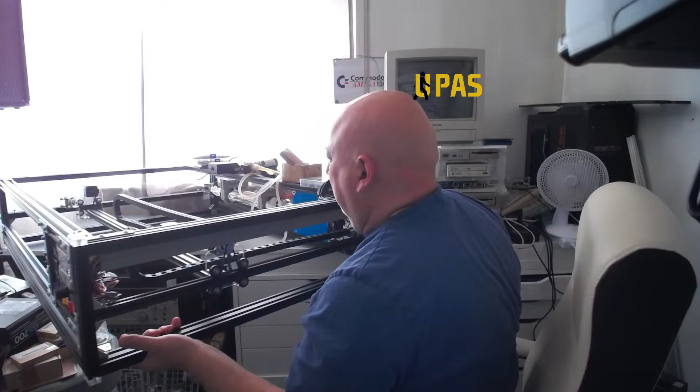I've got to try and shift this around slowly. I was going to do this last night, but I was so tired I went to bed at about 9 o'clock. So I was too tired. Right.

Right, what have we got? Okay, well we can see it here. That's alright, yeah, we can wire that. Right, let's move some of this stuff out of the way. Let's give it some weight, which will stop it tipping down.

Right, I put a load of these temporary things in just to hold everything in place. I'm going to be taking all this stuff off and wiring it in with those terminal blocks that I've already got, wherever I put them.

Alright, can't need to find them. Down. Somewhere around here. Right.

Yeah, I've got a load of these connector blocks, so just grab another one. Oh, that's broke, that one is. So it must have been broke in transport, whatever, let's get another one.

I've got plenty of these, so right, let's get another one. Let's put them away.

There is one out here somewhere already, but I don't know where it is. Can't find anything in this drawer anymore. Okay, can't find it. Oh well, we'll just use another one then.

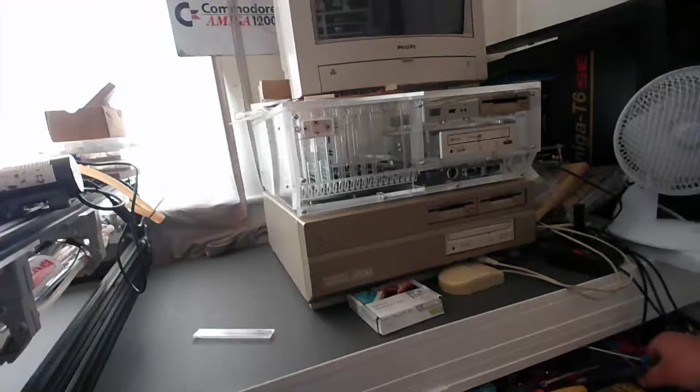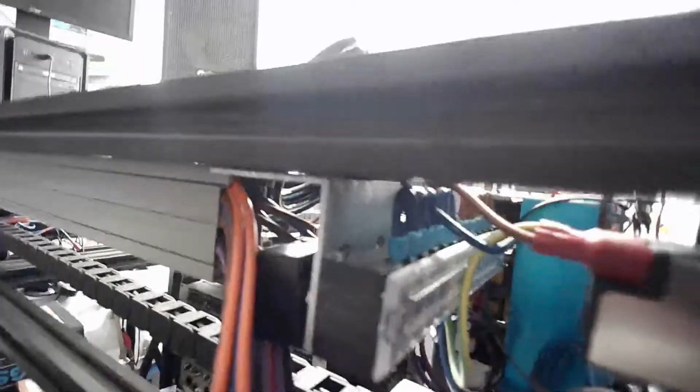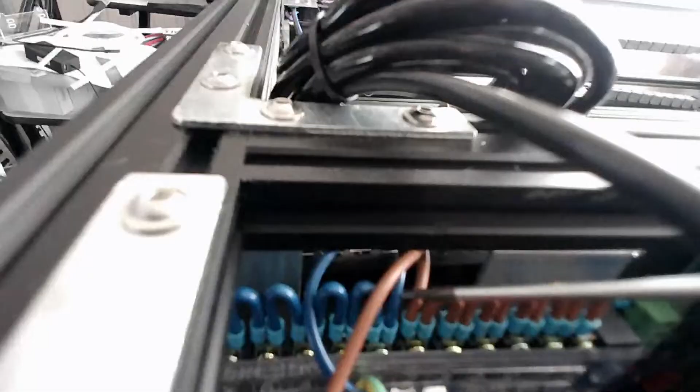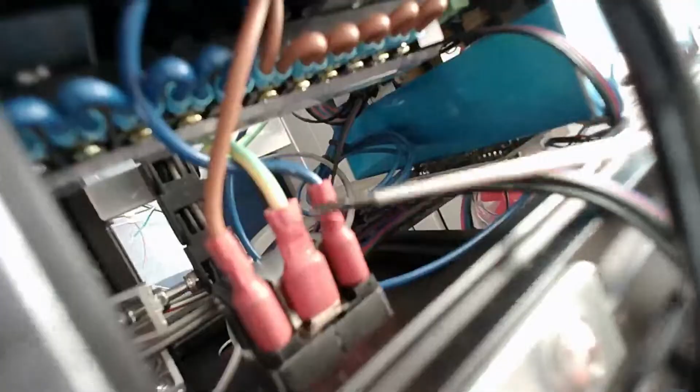Right, so we've got this one here, it's the mains. It's got neutral... can't see it... neutral and live joined up, and this 2 panel. Neutral live goes to the front rocker switch, and also got neutral and live on the back of this IEC connector, which goes out to the switch. It goes from the mains input over to the switch at the front. Switch then comes back over to this distribution here. I'm only using, I've got some wires wired to it underneath. We've got live and neutral going over to this plug on the power supply. I've also got an earth that goes on straight to the back here, I think. Yeah, the earth goes straight to the back on the earth pin on this IEC connector.

Alright, so the idea is to somehow wire all this. Probably it would have to go to, we don't want too many links if we can help it, so we can go to a terminal block and then go out after with a little link, or we can go straight to where we want it. Would make more sense. Otherwise you're doubling the work, having to go to one point and then out to another, and you could label up what each wire is. But there's 31 wires.

Anyway, I have an insider's view of a streaming setup, the radios and all the rest of the stuff. Yeah, it's crazy, yeah. Streaming land. What the hell's that? Who's that moaning about? Some idiots on this radio.

Anyway, right, so you got a little close up of this corner piece I milled. This is literally to stop me scratching myself on it. I put one on the bottom, I'll put one on the top, so it stops me scratching my arms on it, stops me taking slices out of my arms.

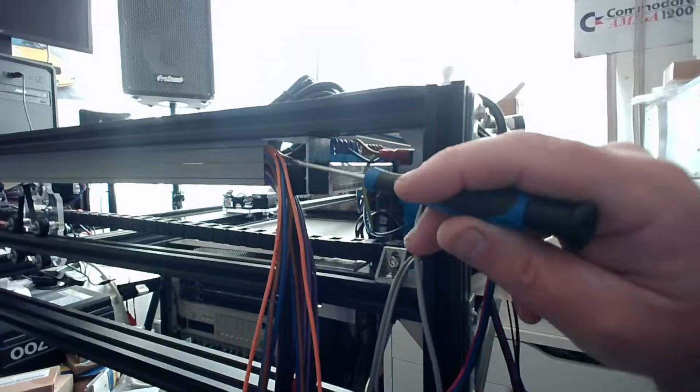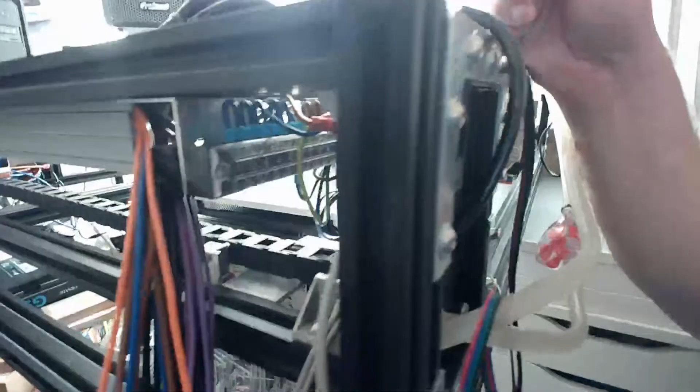Right, so I'm just contemplating whether to wire this straight to that and then join, so it gets rid of all these wires, and then I have to come off there and go around. Lots of that stuff just connects here anyway. Well, yeah, some of it comes down to the mini Gerbil, the mini Gerbil. So we've got stepper motors.

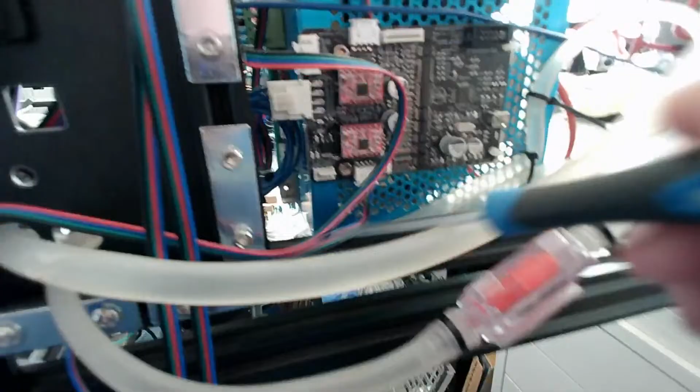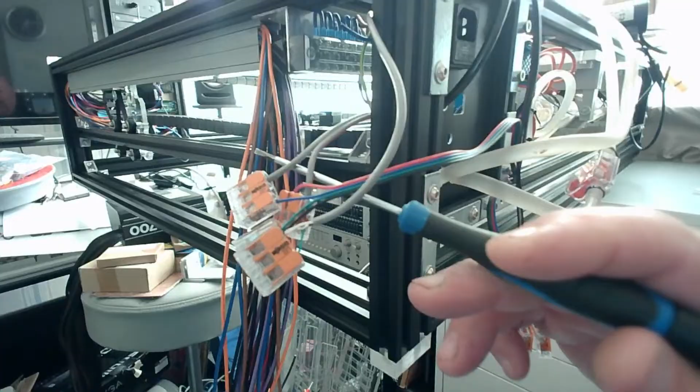So I've got to connect... yeah, there's some more joints down here, I think. Actually, there's not, that's just the limit switches, there's all the limit switch connections. But these have got to be taken off, these are temporary. All these were just temporary connectors, just to sort out the wiring. Once it's proven, it can go and be wired permanently to one of these.

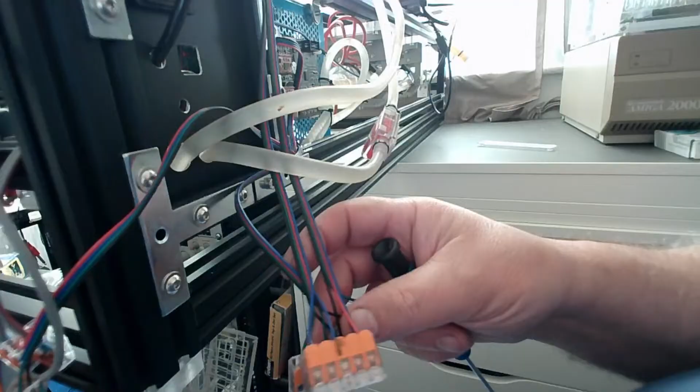The same with this one for the stepper motor directions. You've got your 3 stepper motors, and these 2 actually swap over, all these 4, yeah, they swap over. This is literally a lead to the Y, and then 2 stepper motors coming in, so all that's got to be changed as well. I've just borrowed these to get it working, but I've got to give them back to the van, I'm not using them, I'm using another one.

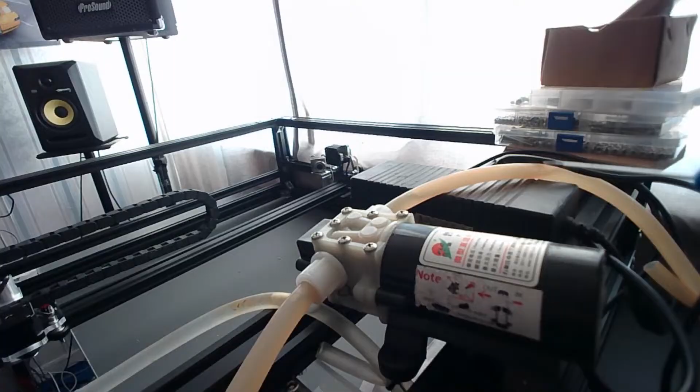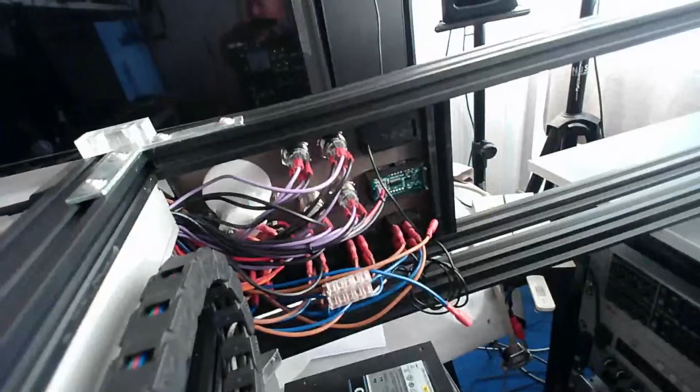So that's what we've got so far. There's a bit of kink there, that's not good, so that's got to be rerouted. We've got our water pump, it's got to be mounted, and there's a power supply for the water pump, 24 volt there. I also need 12 volt DC to power the meters, there's the back of the panel to power those meters, 12 volt DC.

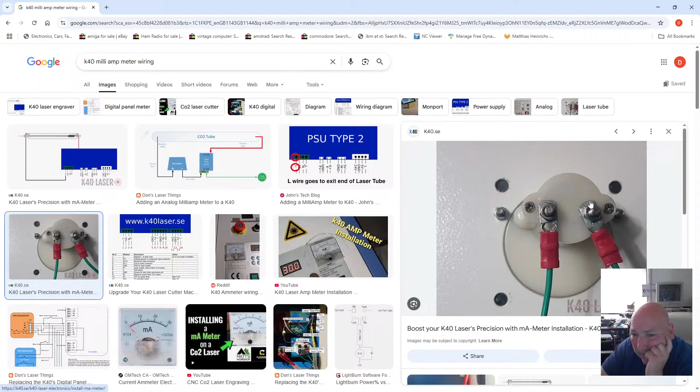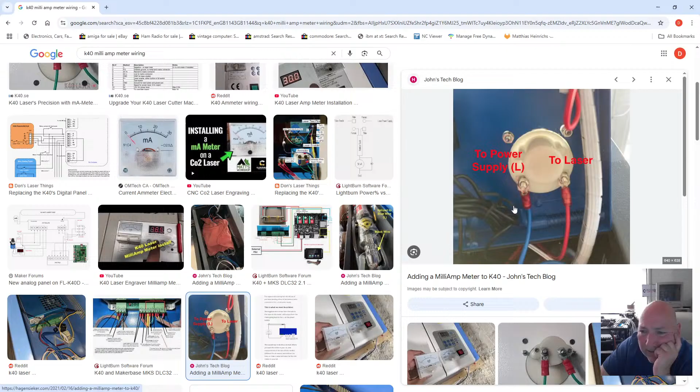Right, K40 milliamp meter wiring. Right, milliamp meter, right, there's one. Doesn't show you plus and minus. No plus and minus. Right. This one shows - mixed bag. That just shows you a meter. Oh, it's a 50 milliamp meter.

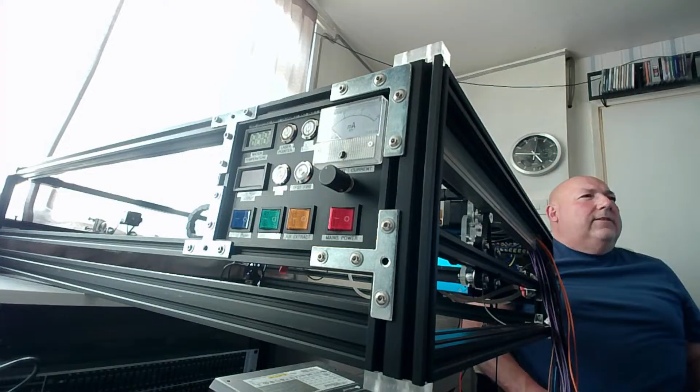Right, so I put a bell test on it. I can't see, right, so I'm going to use this roaming cam to position, set this over here. Right, we can see the meter. If I put the meter, hopefully we can see the meter go up or down. Let's see.

Oh, definitely moved, but not sure which way around. So that's going down, so I'll swap my probes around. Let's go the other way. Yeah, that's definitely going up, isn't it? Yeah. So it says put, well, I don't know which way the plus and minus is. Oh dear.

So I've got my plus probe on this wire, and they said that's got to go to, I forgot what it said now, so the minus has to go to the plus on the meter. So that's that one, if it's going the right way. Right, let's sort that out. So that is going to go over to, yeah, that wire there. Right, so I need to extend that wire to reach over there. Cut this one - well, if it's wrong, I can always swap them at that end after. And that's going to go over to there. Now, is that going to give me enough? Probably, let's keep the wiring the same.

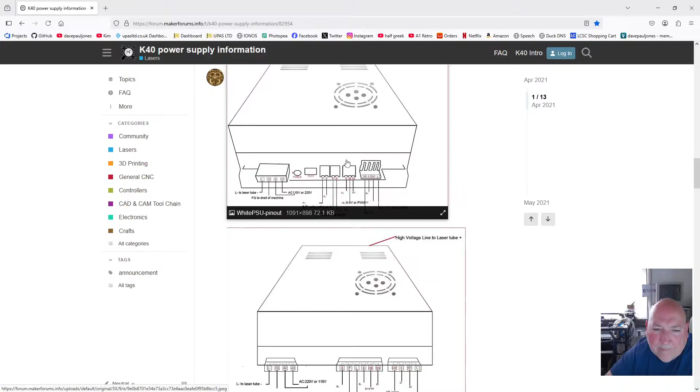Right, which one did I put it on? No, that's not it. That's not the one. Just trying to get to it there. Right, there's the power supply. There it is, that's the one I've got.

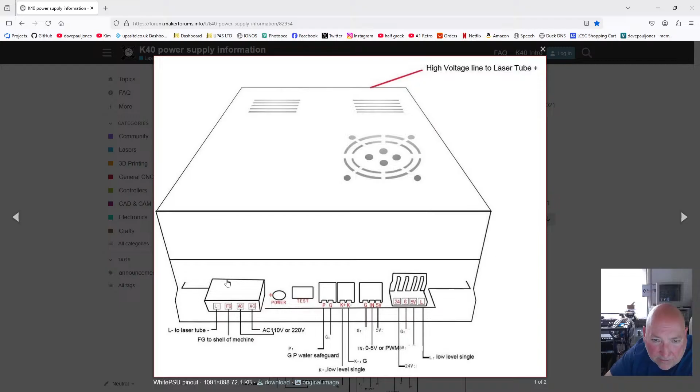So you've got L, low level signal, that's to enable the output, which comes out, cathode comes into there. The red wire goes straight out, so I've got to interrupt that through a stop circuit. So I've got to break a connection.

So we've got to find that plug with a connection on it, and it's just down here, and it goes straight to the panel. So I've got to unwire this.

So I could go onto this camera again. Right, so we're on this one. I suppose I could put this up here.

Ow! Oh yeah. Ow! Just burnt my arm on the saw. I forgot I left it there. Let's turn it off, I don't need it in a minute. Did I burn it? Not quite, not quite, that's okay.

Right, so I'm going to put this, try and put this somewhere we can see. So I can put that over the top. How about if I shove that like that, looking down like that? Maybe. Or like that. Like that, maybe. Can't see a lot, yeah, there's not much you can see really. Anyway, we'll do a bit like that. Why not?

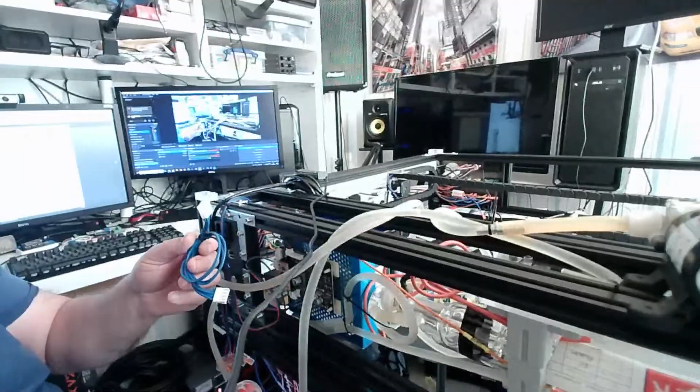Right, so I've got - oh, there's another one. Put the loads on it. Right, so I pulled it off, that's alright, pulled it off altogether. You can't see. I pulled it off, so let's get this tie off.

Okay, right, I must have burnt my hand, because I must have burnt myself. Yeah, a little bit. Right, so we need to interrupt one of these cables.

Now one of these was broken and I had to fix it, so I fixed it. So that one plugs into there. Now I've got to see if these are all the way through. That goes to that one, second one goes to second one, and the third one goes to - they're all the same bloody colour.

Right, I don't know which one's which now. Right, I don't know which one's which. So that one's that one, and that one's this one.

Oh, that's weird. Oh, it must be that one. I don't know, anyway, I think it's according to the power supply. It's the one that's on the left, this one here. So what we're going to do is cut this one here.

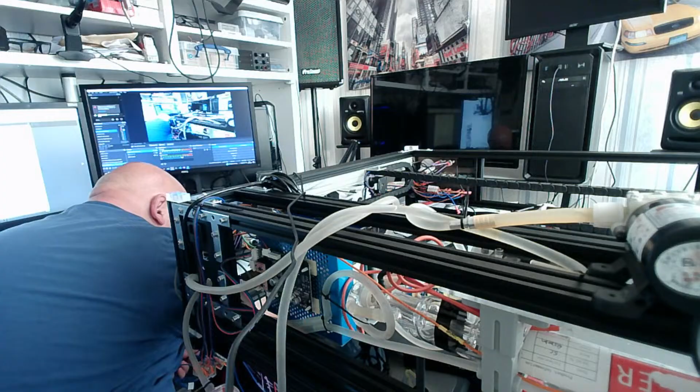Strip these back. Let's put some ferrules on them. Couple of ferrule cats. Right, okay.

Right, so now I need to connect this to - alright, so this will have to go up to a connector block. Alright, so that goes over like that.

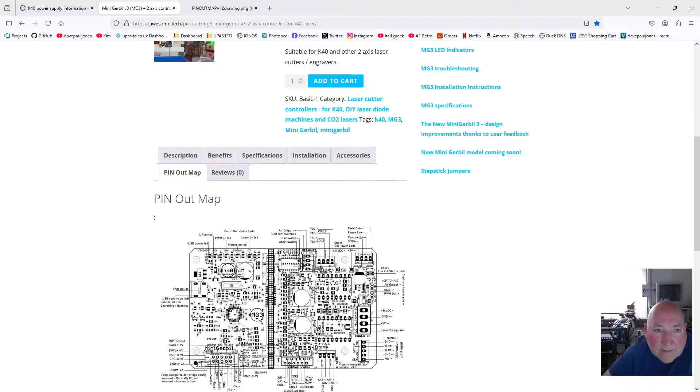Right, so what I need now is a drawing of the - another drawing of the Mini Gerbil V3. Alright, so there is low signal, laser on signal, LO, LO, which means laser on. So that's got to be connected from...

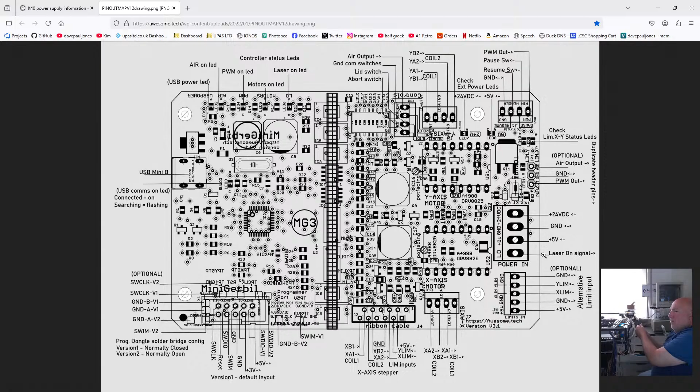Laser on, which one is it? It's - hang on, I've got it upside down, haven't I? But my panel's the other way around. So laser on is the top one, which is the right one. It's the right one I've cut, yeah, it is the right one I've cut. So I've cut laser on, which is the top one.

And that has got to go through a switch. So through a switch. Now I'm trying to wire it up. So...

Okay, so I could wire it up to this. Wire it up to this, so let's just do that then. Let's make the laser on signal, that's it, let's just do that.

Alright, here we go, I'm going to put it on the end here. Now it will go on that way. This one's cracked as well. Right, so it's going to go on that way, so it's going to go on the underneath. Trying to work with everything in reverse here. So that's going to come into there.

Wire that to there. Now the other side is going to go next to it, and all I have to do is splice, find the two cables for the laser on switch, and wire it up into the top. Now, hang on, is it the top? Yeah, the top of there.

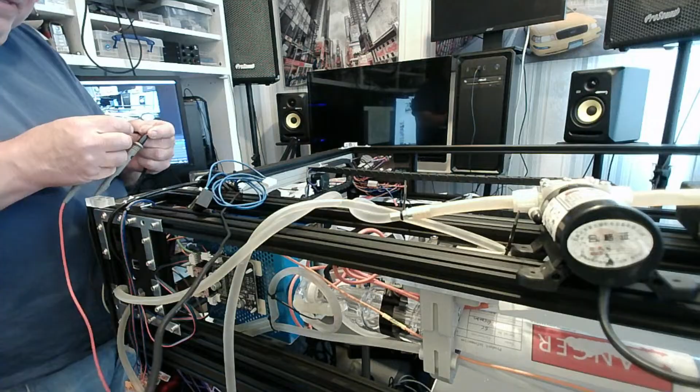Alright, so okay, so that's the enable switch, I believe. So let's try it again. I've got continuity. I'll go and switch the switch off. Continuity should have gone now. No, it's still there, so that's not it. It's still there.

Alright, now is it that? Right, I found a switch, but it's not the right switch. So, but they are going to the same thing, so I'll put a knot in that because that is a pair. Right, now I need to find some other pairs.

Right, very thirsty today. Very thirsty.

Right, so we just got to find the pairs. Now, did I switch them back on again? No, I did. Now I've got to find a pair of cables that are short. So that's not one. Let's try some others. Not that one.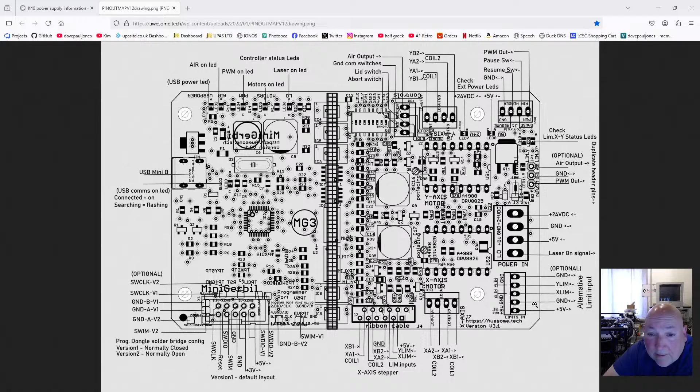Right, so what's next? Let's have a look at the model. I'll open up the model. We'll have a look at the model, see which wires we're going to do next. We can't do them all, we can just do a few. Well, we can do what we're ready to wire up, so we can at least test it and set it up.

Alright, the radio's hissing away. It's red hot in here, with all these computers and monitors on. Red hot in here.

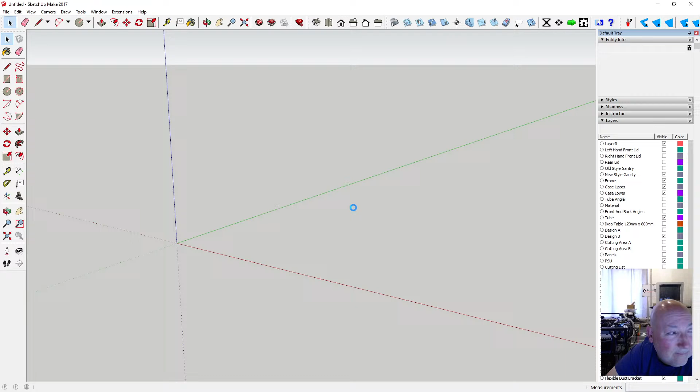Right, here's the front panel. So I've just done that one, laser on. Test fire, we can't do that yet, because I've got to work out how to wire that yet. Laser pointer and LED lights, not yet. The mains is wired. Air extract, air system, water pump we can do later.

Temperature gauge, we've done this one, it's just a sensor. This one, power outputs, that needs to have a transistor put on it with a pulse width modulation out, so that's not going to go anywhere yet. Test fire, so the pot is controlled in software at the minute. So all we need is to be able to switch it on and turn the laser on and off, and the meter. So basically we've got what we want. The water pump.

Actually we can terminate, yes, because once we switch this on we're going to have potentially live wires coming out. So we need to terminate these into a terminal block at least. Yeah, so we can do that. And they really need to go on a separate terminal block. How many do we need? So we need live and neutral, live and neutral, live and neutral. So we need 6 terminals. Yeah, we can do that. I can leave a space.

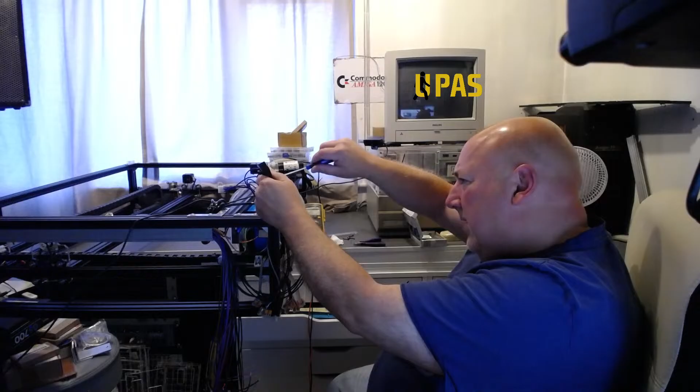Right, so this is the laser pointer enable, so that's going to go next on here. So at least we keep all the switching on the same unit, and I keep the high voltage on a separate one.

Right, so there's a lot of live streams and they're long-winded. What I'm going to do when I've finished it, I'm going to do either a 10 or 15 minute run through the videos. I'll edit it though, an edited one, 10 or 15 minutes from start to finish of the laser, with all the tips I've learnt along the way and information, and it'll be a bit of a helper for anyone trying to build their own. Some of the questions that I've asked take you a long time to find them out. Might as well watch that video and you'll learn it quickly.

Right, so that's the laser pointer wired now. I'll switch over and wire. Next is the LED light, which is that one there.

Just done that one, I'm doing that one next. So another 2 black wires it is for that one. I've just switched the other one off and switched this one on, so it's got to be one of these wires here. So I'll take one of them.

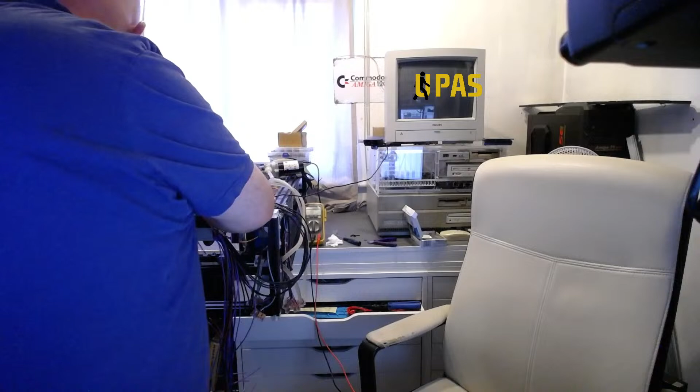It's definitely the right one. That's definitely one of them. Let's get to the purple. Right, that's the black. Let's do the black next. Yeah, that's definitely the one. That's definitely them two. I'm looking for purple. Right, purple. That's that one.

Okay, so we've identified the pot. Right, this is the pot, 3 wires for the potentiometer. So let's just trim them off. Not using this pot at the minute, but we'll mark it off so it's out of the way and we know where it is then.

If I measure it now, it should be giving us about 23k somewhere. No, okay, 28k. Oh, maybe it's a 30k pot then. Yeah, 28k ohms. Alright, so if I connect between there and red, it's 28k. If I turn the pot halfway down, 14, yeah. So that's definitely the right one.

Now we'll put some ferrules on it, get it wired somewhere. Well, we've run out of switches now, but what we haven't brought over is the LEDs. So we've got the switch, and then we want the LEDs. They've got to be switched on and off. So there's more to that circuit than meets the eye, basically.

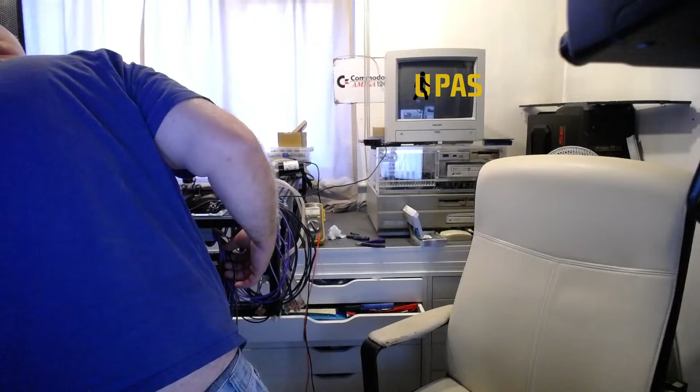It's definitely going to that switch though. Right, push it in. Try again. Yeah, it's going there now.

So that's common there. Tell you what I'll do, I'll just push it into that terminal, because we're not using it at the minute anyway. If I push it into that common, this one will be normally closed. So if I measure that now, it'll beep no matter what I do with the switch. It's beeping now. I turn the switch, yeah. So that gets rid of them.

Right, what's next? Next is these six wires that switch on. Now there's six wires that switch on the air extract, air assist and the water pump. But these are potentially live wires once they're switched, so they need to go to... scraggy wiring. You need to pull each one of these a little bit.

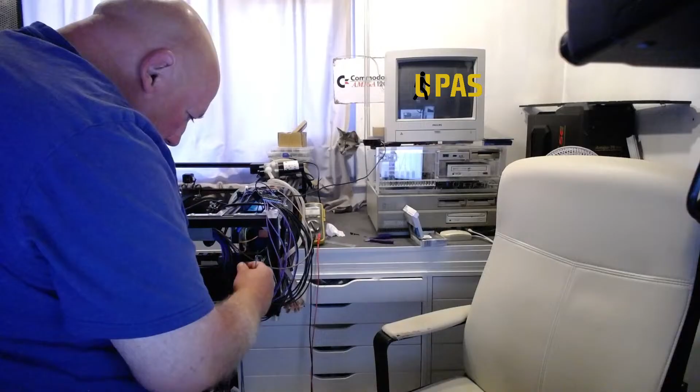That's the negative for that one. So when we're ready, all we've got to do is put our air extract negative and live onto that top, and we've already got the ability to switch it. Right, find two more. So air assist now.

That's... oh, we haven't even got a ferrule on that one. Said it was the last ferrule, I was lying. I found another one.

Right, so live first. Okay, now the live. No, the neutral, sorry. The neutral. Okay, so the only two that are left are the water pump. Let's just make sure them are on. Yeah, them are the ones. Okay.

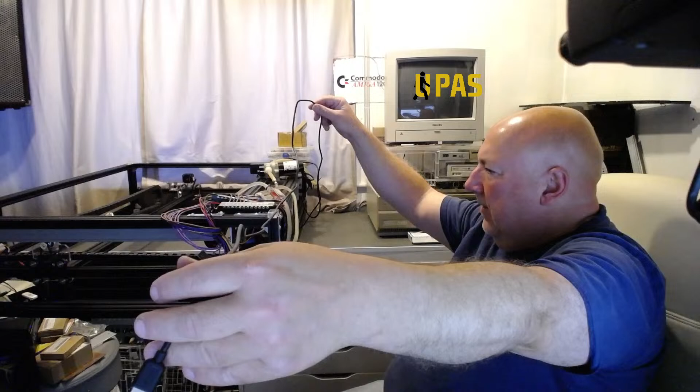Now I've got to somehow spin this round while still having this here. Right, that's going to be interesting. So, right, I've got to spin this round now. Oh, we've got to get a mains cable in as well.

Right, we've got a mains cable to plug in. Now that's in. Now some of the switches are the wrong way around, so the LEDs will be on when they're supposed to be off and vice versa. So I'm going to have to swap them around till they're right.

Right, so I'm ready to plug in, sort of. And I've got to turn it round. Why have I got to turn it? Oh, so we can see the display and operate the buttons. A bit safer now, so we can turn it off from there instead of coming round here to turn it off. Right, let's balance all that on there.

Right, here we go. I've got to swap it all around now without severing any of the cables. I've got them hanging around here. Right, here we go. I must be mad. Why did I make this thing? I must be crazy.

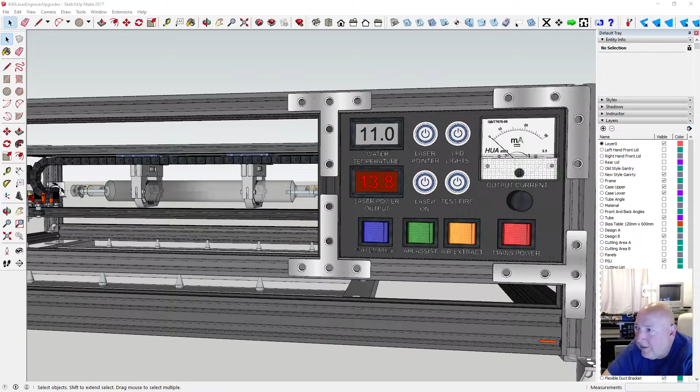Now at the minute this drag chain here, better if I show you on the model actually. So on the model, I've put that plate there, but we've got all this sticking out, all the wires. And when the carriage gets to this point, this bend hits there, and the carriage is still here, so it might be too much drag chain in it - I might have to take some drag chain out.

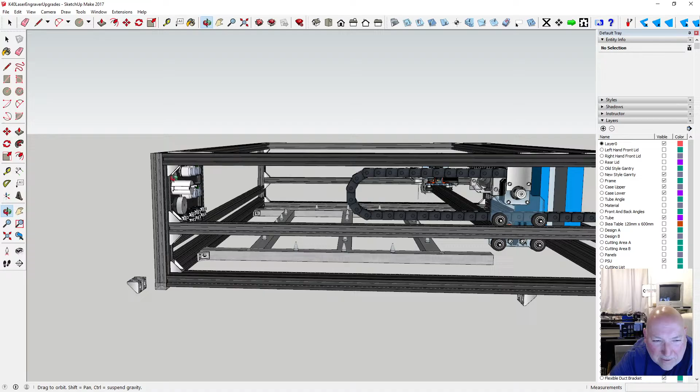Now that's not going to be easy because it's all wired up, but it was all measured up without this in place. So I think what I'm going to probably have to do is devise something for this to stick out a bit, because I really want all this cutting area, so I'm going to have to mount it.

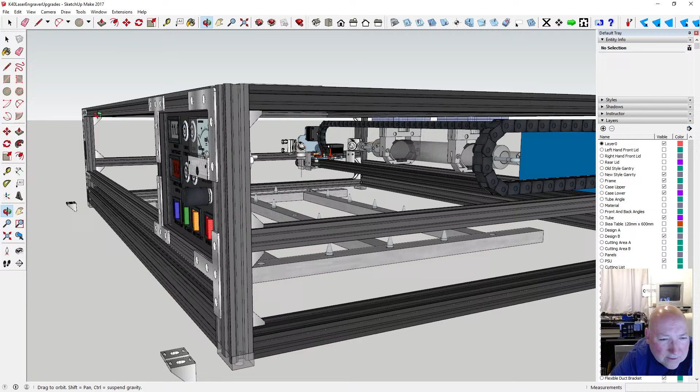Yeah, I'll figure a way of mounting this plate out, so at least the back is flush. Yeah, I think I'm going to do that. And then the wires can come all the way around here and not stick out all over here. So that's what I'm going to do next, and I'll have to try and work that out.

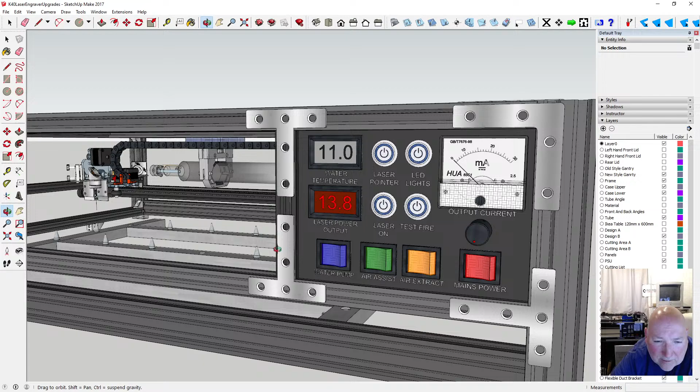I've got some brackets, it's got some angles still. Now, if you notice, these brackets are holding the runners together. If I get the angle done in a nice way, they could replace these and hold onto there, then the panel could sit on the front. Anyway, I'm gonna have to sort that out, but that's only stopping me from going right over.

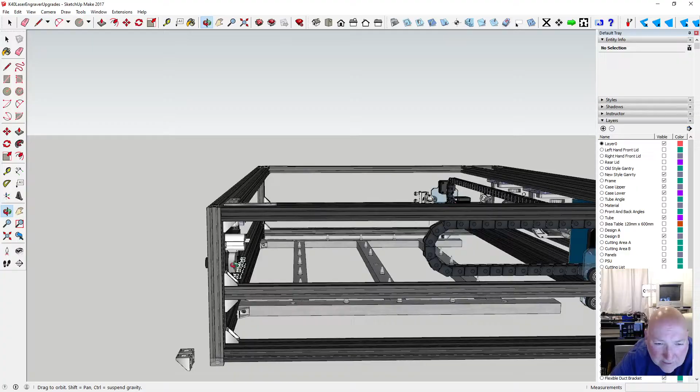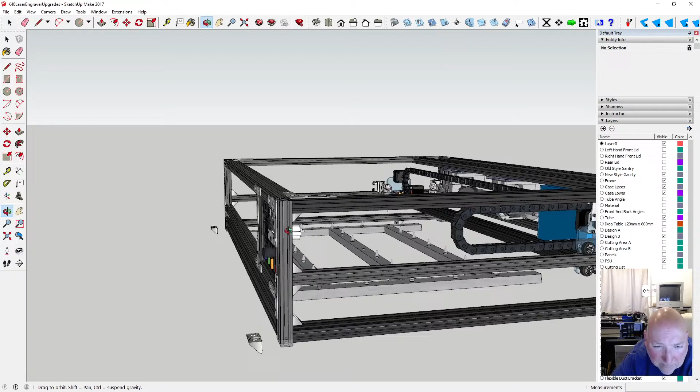For now, to sort out the rest, I could come as far as this and just get it operational. And luckily the wires come out of the trunk and they go around this way, so there's enough wire to push it a few inches this way, to keep that panel level. So I'm going to have to do that. There's not a whole lot of room here for the brackets and connectors, but yeah, we could - they're hung off a bracket there.

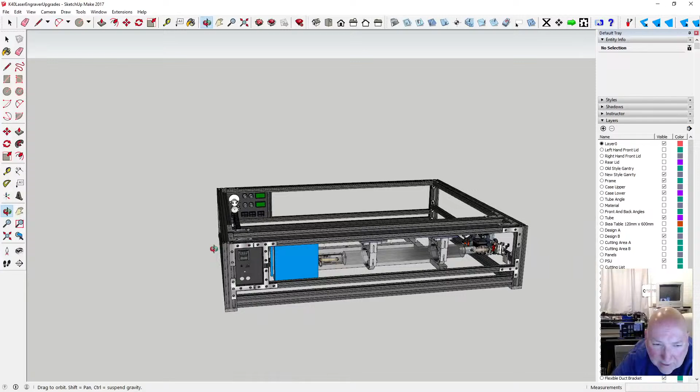Anyway, right, so let's... have you added washer spacers between your wheels? I didn't do that and it jammed my wheels up. Ah, gotcha, Glenn. No, I haven't, no I haven't.

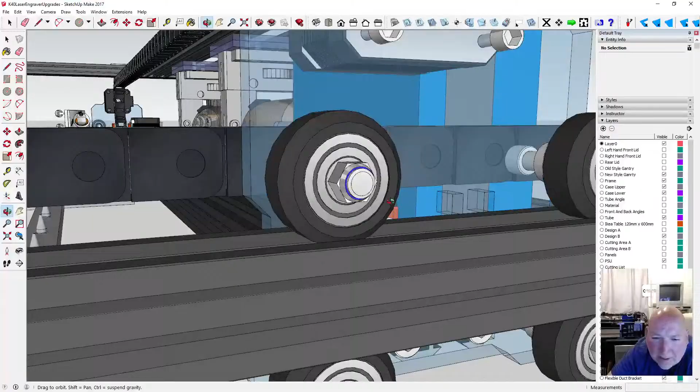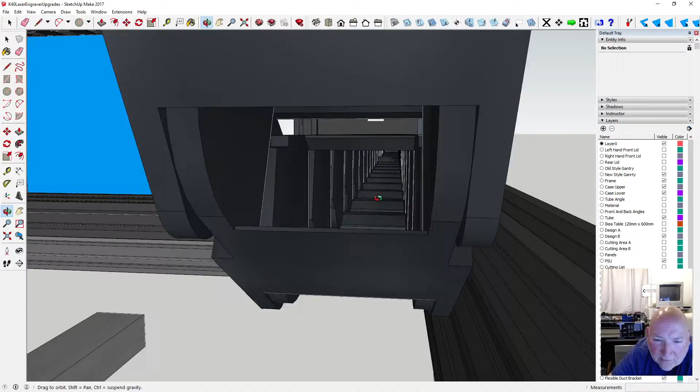And they are varying - if you try different ones, they're working differently. So you're saying the washers, yeah, so on the model, so you're saying in here, washers here, I've got a spacer this side and I've got just a nut and there's no washer. There is no washer, but they were running free until I put the drag chain and pipe, because that drag chain is full up of wires and pipe, and I even had to put a wheel here just to keep the drag chain flowing. So anyway, there will have to be some tweaks done.

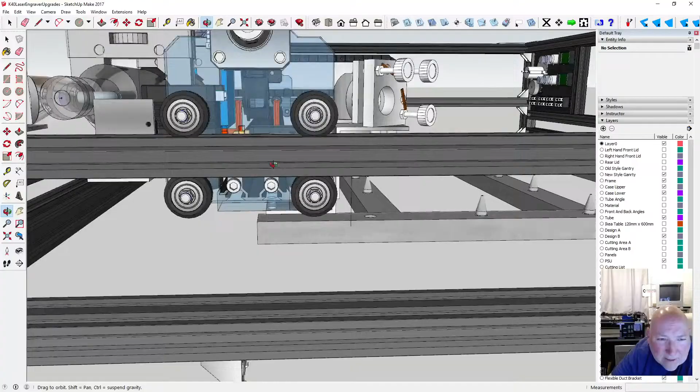So as yet, they're not greased or anything, they're just as they came. So you're saying you have to put a washer? I've got the spacer on it, that's quite a bit bigger than the nut.

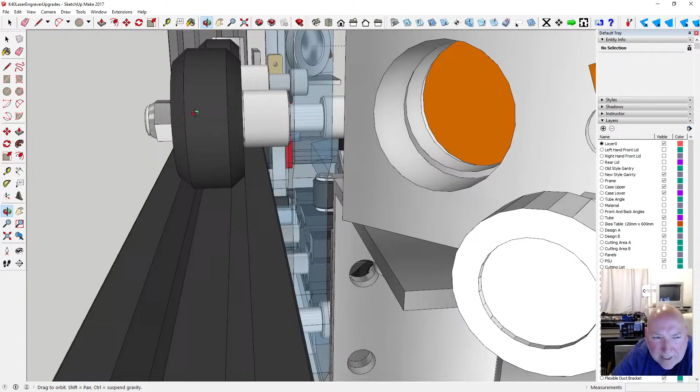I never thought about it, so now I've tightened it. It was tight before I put it on there. I've got some spare parts - spare wheels, spacers, and bolts, and a spare carriage, so I can build one up with the spares and see if it actually locks up. It may not lock up until you put pressure on it, maybe. Maybe now there's weight on it, it's shifted it, like you say, could be.

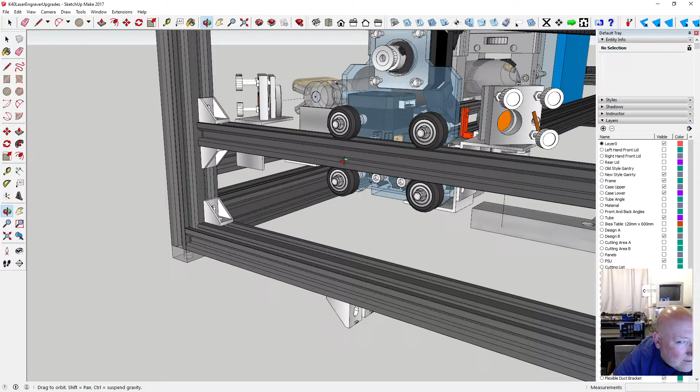I mean, the two bearings in each wheel, a washer goes between them to space them out by about 0.5. Oh sorry, let's read that again - the two bearings in each wheel. Well, the wheels were built... right, I see what you mean. Right, let me tell you what - let's get one out, hang on.

Got some spare parts here, spare wheels. So I've got spare wheels, let's get a spare wheel out. And so this is how they came built, like that. They just came like that.

Now you're saying there's two sides to the bearing, is that what you're saying? If you pull them out, it needs a washer between the two, is that what you mean? I think that's what you're on about, because I think they do come out. Let's try and lever them out with something - what have we got? I haven't messed with them really, I thought they were all sealed up. I can't seem to get them apart.

Not quite sure what you mean - do you mean in between the two bearings? There's two - oh, there is like a washer. There is a washer in there actually, I can see it. On the inside there are two bearings on each side of the wheel. A washer goes between the bearings, yeah I can see, if I point it there you can just about see something like a washer.

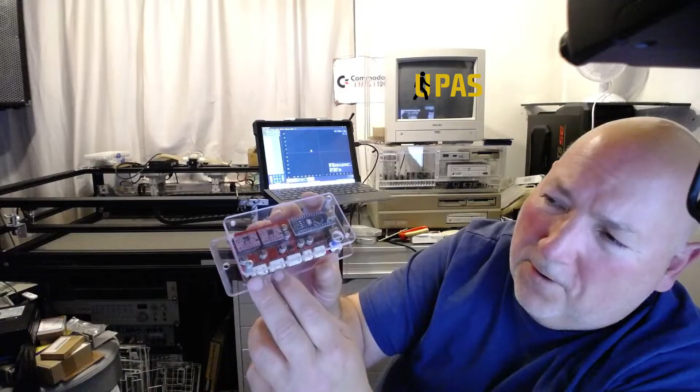The motors are NEMA 17. Yeah, they are NEMA 17s. That's what was on the little one I've got, the little diode laser, 500 milliwatt diode laser.

But there's no drag chains on them, there's no air assist, there's no pipes holding it all back. So, yeah, it's a bit of one of them, really.

Right, let's give you a bit of a review.

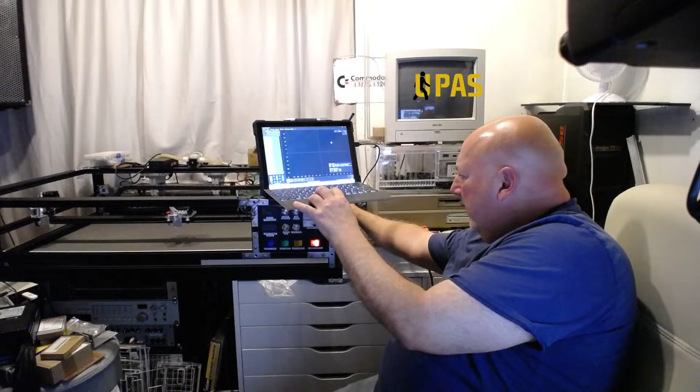It's stalled there, it's just stalled there. I'll give it a bit of help. Yeah, if I'm giving it a bit of help, it's fine. Now it's stalled.

Now there are some settings on the mini Gerbil, dip switch settings, so I might be able to alter them, not sure yet. So not sure, I'll check the settings.

You can split the signal to 2 drivers, same pulse width modulation signal. I see what you mean. So you can get those, yeah, I believe you can upgrade, or better still, some. Okay, so we can upgrade them, and they've probably got some more power rating. Gotcha.

Yeah, I'll do some more research anyway. So the ones that, those ones were just off a very small little 500 milliwatt, no air assist, no nothing, just a little bit of cable hanging off the stepper, so it's got nothing to do really.

So can I, do you know if they're pin for pin compatible? Yeah, I wonder if I can pull them out and plug in the better quality one, the DRV8825, or better still. I don't mind buying a better controller or upgrading something. It's a mini Gerbil V3.1 that's in there at the minute.

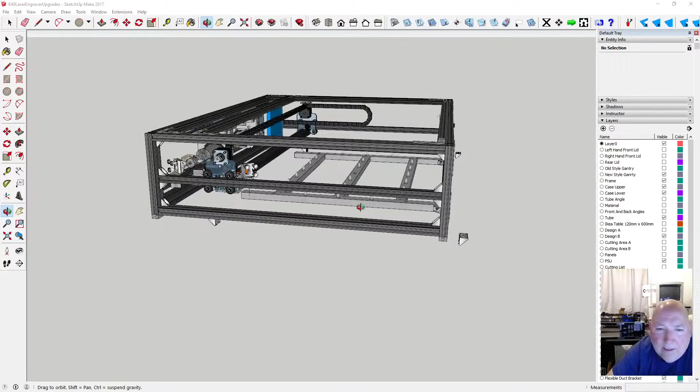Right, let's disconnect from this. There's still a lot of work to do, still plenty of work to do. Once I've got it going, I've got to get it to cut out its own panels. Yeah, it's got to cut out its own plastic panels, as in this one here. So if it put the covers on, panels, that's the idea of the panels.

Very nice setup, look forward to seeing more.

Oh, fair play, yeah. The reason I made it, I was going to go for design A. You can't see it now, hang on. Let's turn off that a minute. Let me just put this into the correct layer. Group it and stick it under design. Design B, right. So design A.

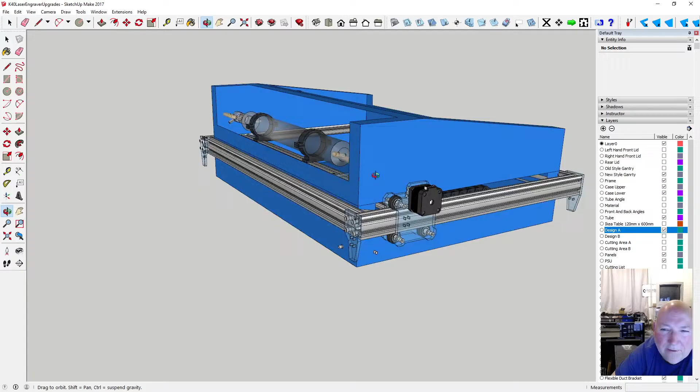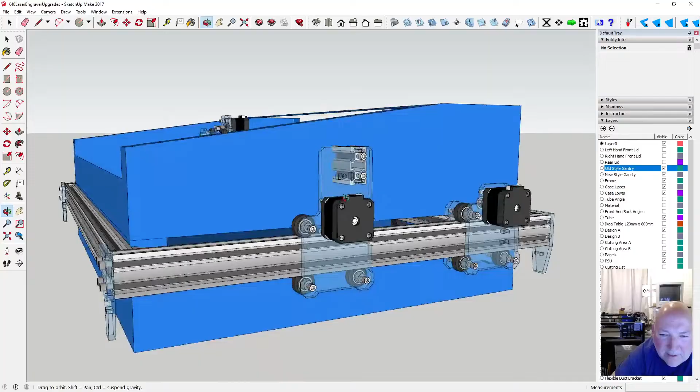This was design A based off a K40. This is similar to my 500 mil size, sort of. That's what it was based off initially, and the 500 milli one, it's got an old style gantry on it. This is the old style gantry that mine came with.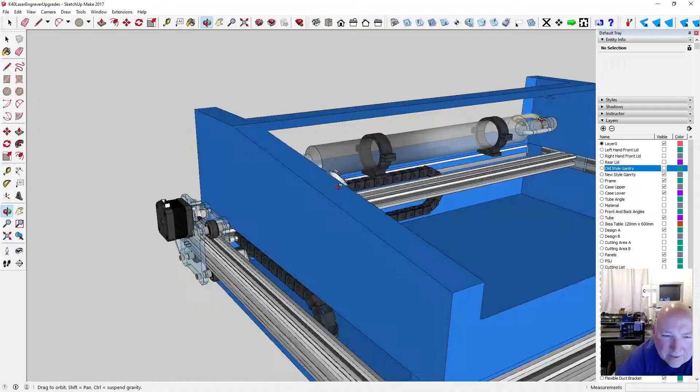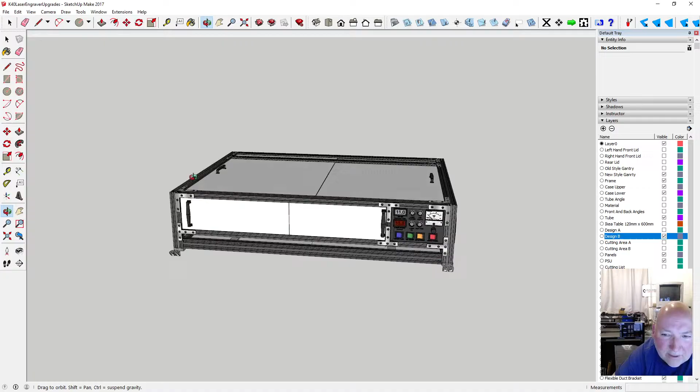That's what I've got basically, and to lower it all down to get it to fit. Originally it was all going to fit inside a K40 case, that was the original idea, but I decided I wasn't prepared to do all that work and then still find I couldn't create the size I wanted. So I thought, if I'm going to go to that trouble, I might as well build a complete one the size I want, basically. Got the slidey doors on it. That's the back bit. Yeah, showing the work off.

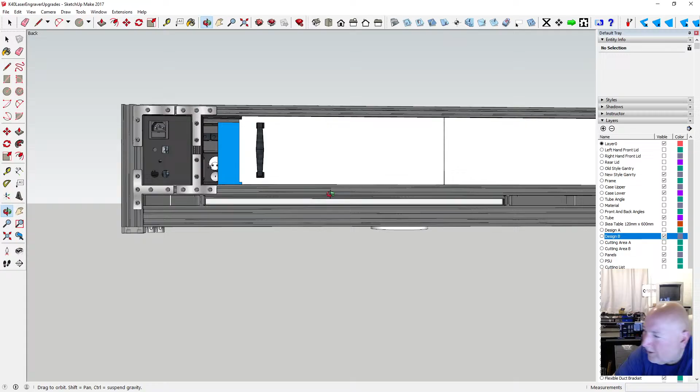Off to bed. Thanks for showing us the build, look forward to seeing all. Yeah, I'm off to bed too as well. 20 to 11, that's enough.

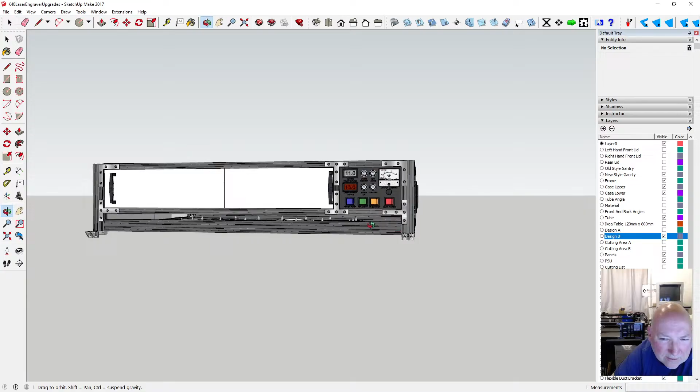Yeah, I say it turned out okay, but I think probably I will mount this panel forward a bit. And the idea was for this to do a metre wide, because I've got acrylic sheets that are a metre wide, and I don't want to cut them, I want to pass them straight in, and out the back as well.

I'm cutting. My focal length is 3mm above the bottom, or above the top of a 6mm piece of acrylic.

Should the driver have the same pin out? You can break out the pulse cable to a bigger or similar drive. Take those.

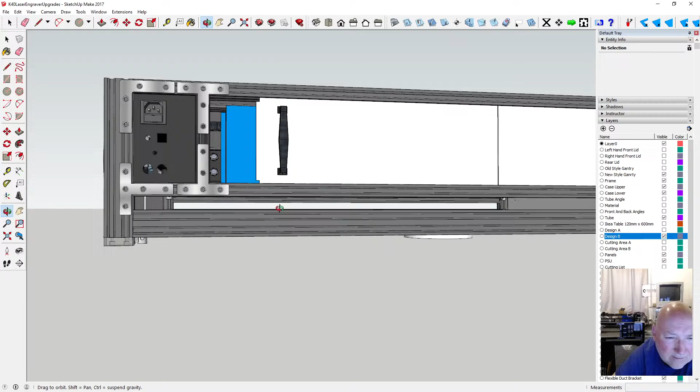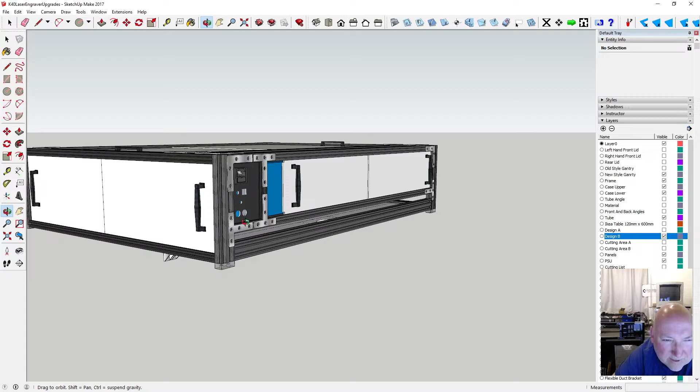Yeah, I'll have a look into it. I need to break it out so I can still use the mini Gerbil and output to something bigger. But I don't know whether the NEMA 17s will take them. I've got my CNC, it's got NEMA 23. Not sure which are on my laser. I've got a video of it somewhere.

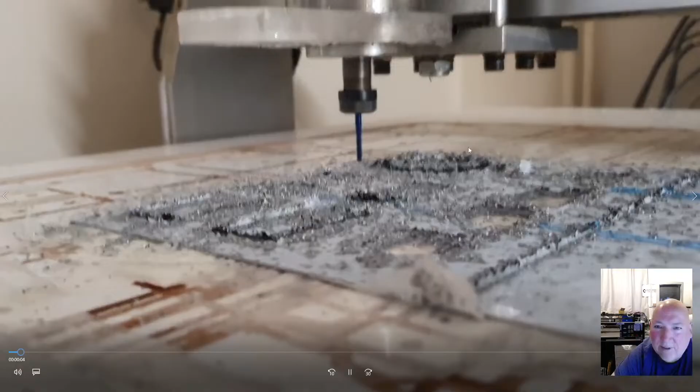I've got a video of the laser. There it is. So this is my CNC, this is my Chinese 6040.

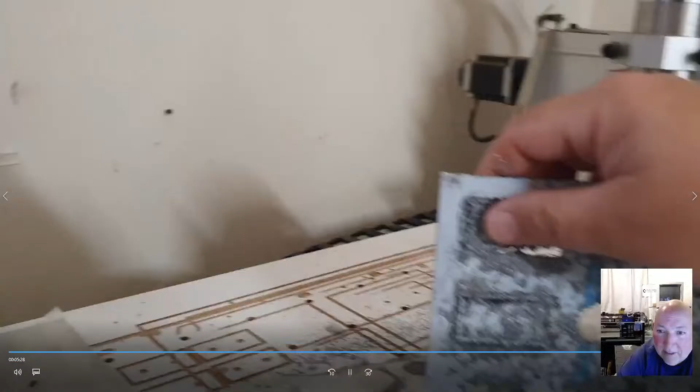Yeah, so these big motors, I think they're NEMA, can't remember now, NEMA 23s I think. That's for a CNC. Chinese 6040, that is.

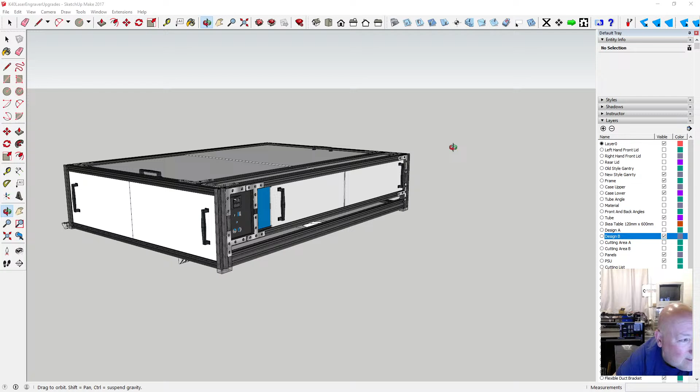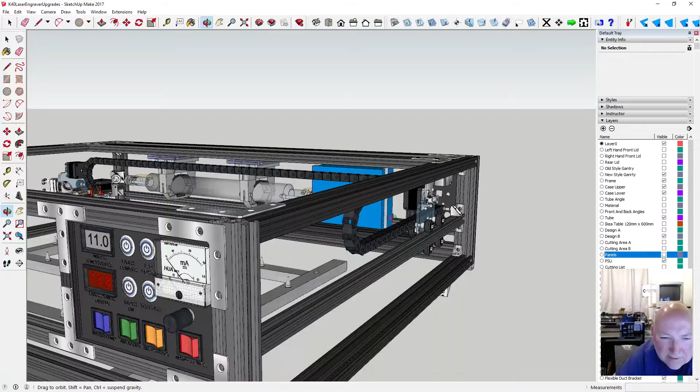I'll look into getting some better ones, but I'll try and free it up first. It's always beneficial to free it up. So this, when it's ready, it's got to be able to mill out its own panels. Then I can put the extractor fan on and all the rest of it. So it's a huge project. I don't know whether I would have bothered if I'd known how much work was going to go into it, but it's either that or spend 2 or 3 grand on one.

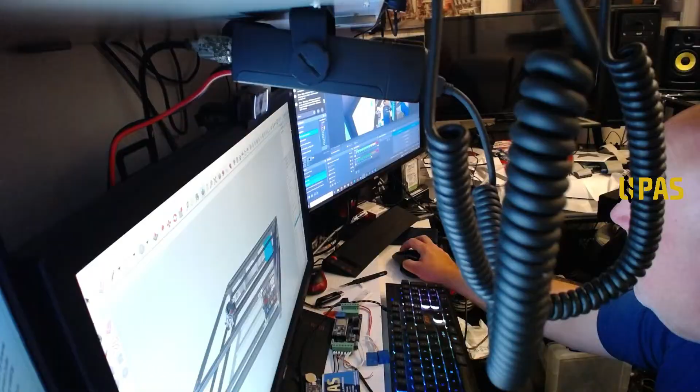Alright, oh, you're on another view there. Got cameras all over the place.

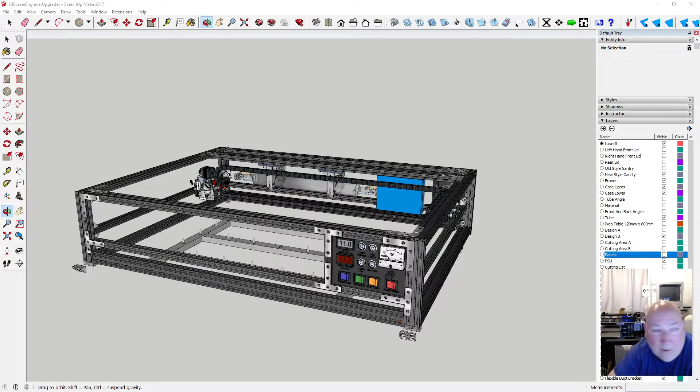Ta-da, wiring the front panel. Well, we wired it, we got it wired. We've got to sort out these. We're going to sort out some grease and that on it, make sure this is free running.

Not sure whether this is a good idea or whether it needed to be a loop belt all the way around, but shorter space. So maybe I'll change the drag chain idea somehow. A lot of work to unwire it though and do it, or maybe spray it with some lube, plastic lube, silicone, to get it to flow.

This is an old NEMA 23, yeah, 17s are good for belt driven, low load stuff. NEMA 17, okay, fair play, that's good to know, thanks for that. I'll put some silicone spray on these drag chains because these were reclaimed and they're a bit dry.

3040 ATM, okay, yeah, it's good stuff. It is good stuff, yeah.